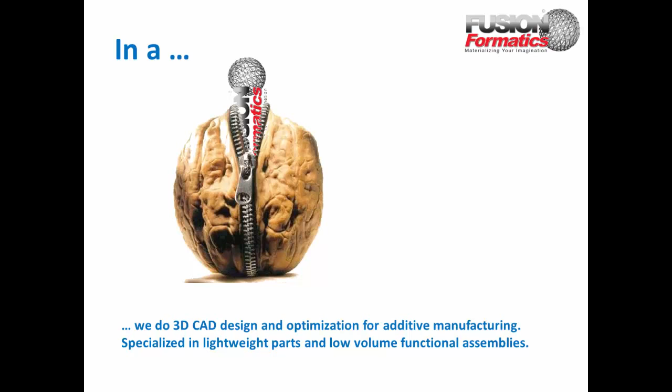So again, we are specialized in optimization for additive manufacturing, and also especially for lightweight parts. Also this for low volume production, not just for prototypes or for proof of concepts, really going into manufacturing, and also for functional assemblies. So we have the focus really on highly complex parts.

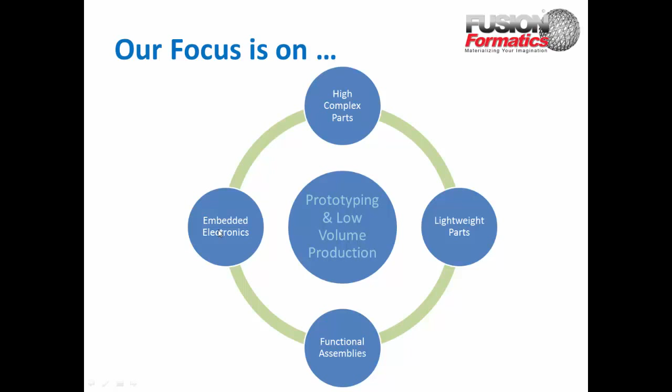We optimize, and we go many times into lightweight parts. We put several parts as an assembly together and can print them as an assembly, so we have functional assemblies, and at the same time we can embed electronics already in the prints.

So our services, at first the design optimization. We do of course also research and development jobs, make prototypes, or also a pilot. So we make a pilot and we can figure out for you what the best way is to print the design optimization, and we can sell you in that case the way how we did it, inclusive the software or the hardware that we use.

We have also print farms, a couple of printers where we can print several parts in an amount, so it's still cheaper than with injection molding. You can imagine if you print 24 hours on 20 printers, that we come there in a good area for ROI, and hardware and software sales is the reselling part.

We are mainly in aerospace, defense, and also in the automotive tool and die. A couple customers also in the dental and medical industry, and it goes further. Of course, we use some nice software like Evolve from solidThinking, where you go into product and industrial design combined with functional design and additive manufacturing.

If we go onto the print farm, sometimes we have a couple jobs just to print hundreds or thousands of easier parts for the entertainment and Hollywood area. And machine manufacturers, we do a lot also on our print farm, since there are a couple parts in the machines.

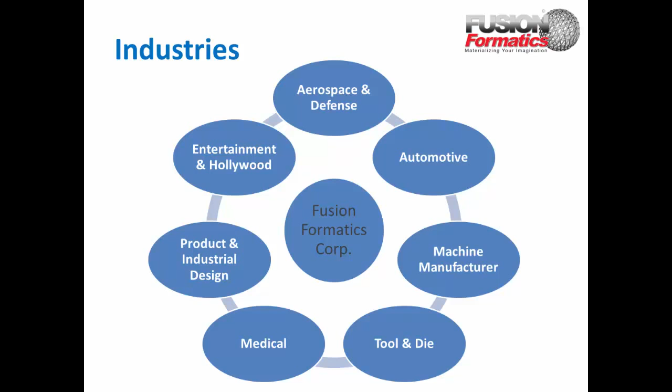When a company doesn't produce more than 10 or 15,000 a year, it's just very convenient to still have printed parts. They're very competitive, let's say the 1,000 or 10,000 parts printed with FDM, anytime open for innovation and changing the part, instead of spending the time and the money for tools for injection molding, and then you have to stick with that as long as it's not amortized.

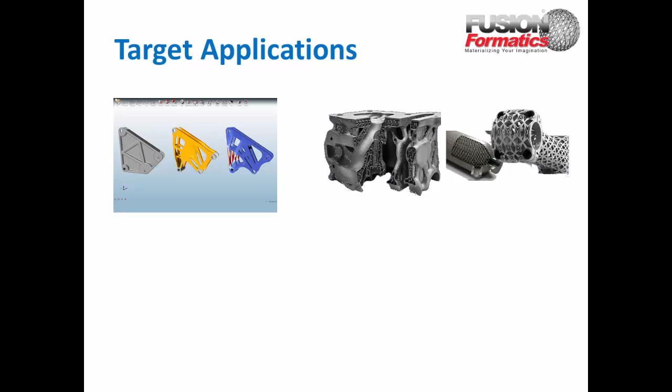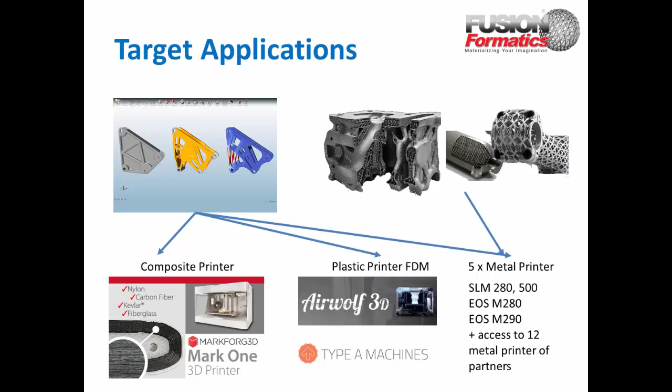So we go lightweight, and that's in different areas. We make hollow cavities or lattice structures inside of the parts, or we really change the design, and with that we can go into composite printing, what we see later on the software for the Markforged Mark One printer. We have FDM printers, and we have a couple of metal printers to go more in this area.

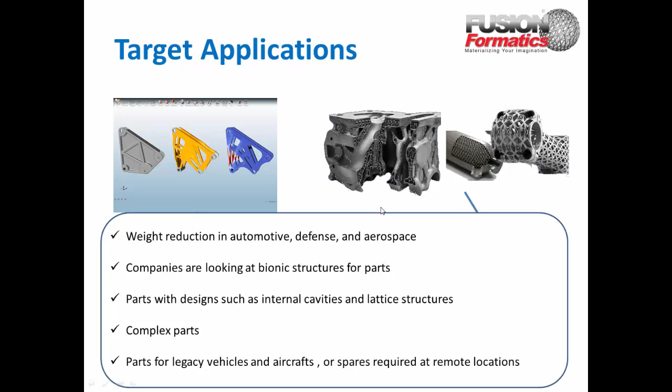Weight reduction, that's clear. Companies are looking for bionic structures more and more. Also lightweight actually goes towards internal cavities and lattice structures. We are interested in very complex parts to optimize them for additive manufacturing, and of course it makes sense, especially for spare parts, not to have everything in storage, but just go ahead and print them if needed. In the medical area, we are also here with PEEK and titanium and different materials.

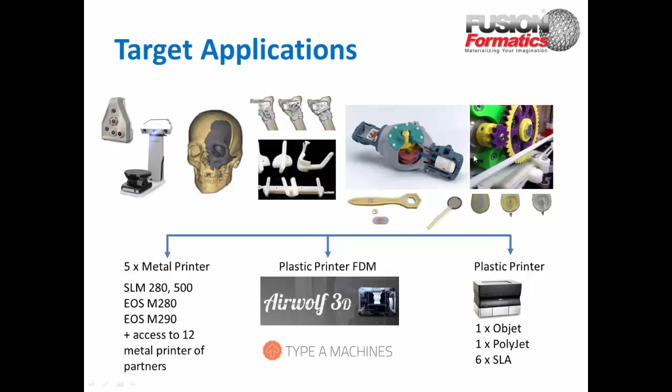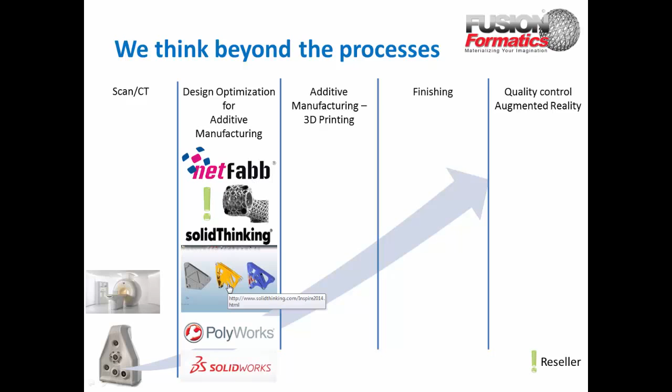Additive manufacturing, we have composite, we have FDM, we have Objet, we have of course the metal printers, and then we have different finishing tools, and also we go into inspection and quality control, even up to vibration measurement. And another one is our augmented reality.

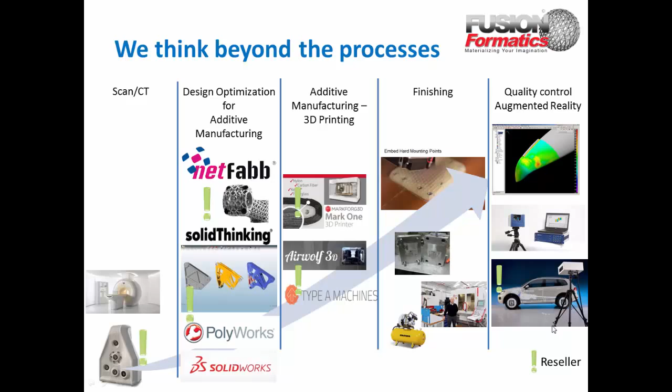We have equipment here, four projectors actually around, so you're never standing in your own shade, and we can project the virtual picture into the reality, in that case a car. This is a technique that we also use when there is an assembly line.

They often have changes, and here the employees are getting nice instructions for what they have to do next, and if it's combined with maybe a printed tool on the Mark One printer with an RFID chip, the software can already recognize what tool is right now being used, and then show the instruction for that.

So this is Fusion Formatics as a small overview, and it's clear that the main benefit in additive manufacturing is really that we can produce parts that are not possible right now in any other traditional manufacturing process, and this brings us to the focus, the vision, and the main benefits of Fusion Formatics as design optimization for additive manufacturing, especially for lightweight parts in plastic, metal, and composites.

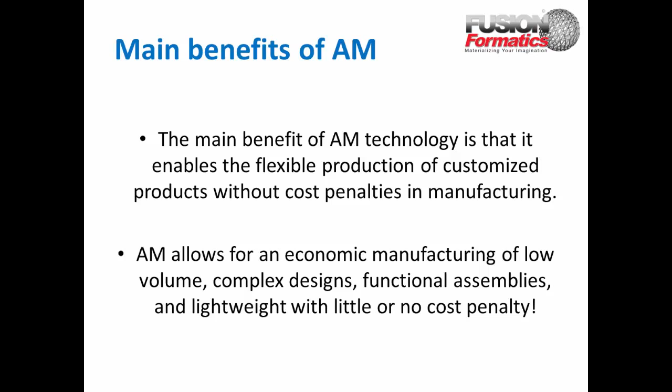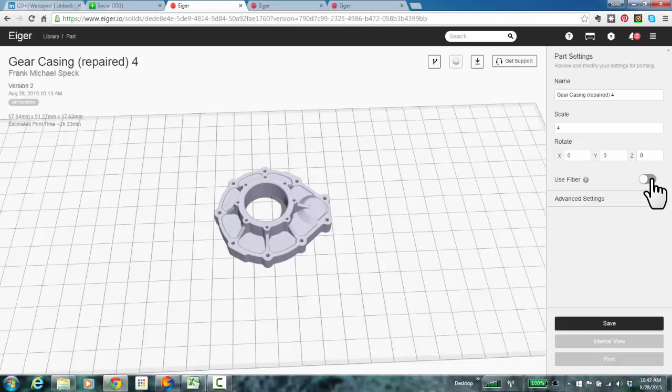You can see here is a part, has also some thin walls, and we want to see how we get the fiber in, and this is how it's on the print bed. Print time 2.5 hours, and we can see here on the right hand side are the buttons where we can go straight through. So the first one, do you want to use fiber?

So you can choose which fiber you want to have and just start from there, and you can say also what pattern you would like to have, concentric, or isotropic. The full makes it really completely full with fiber, as much in each region as you go in. It keeps the same angle. The isotropic, we can change the angle, and what that means, you can see if I go into the internal view in a couple seconds.

I go here a little bit further to the advanced settings. You can also make here a choice if you want to use support. This is very nice to have the option to say no, I don't want to use support, and we optimize the design for additive manufacturing, where Fusion Formatics is specialized in. And then you can have a couple surfaces where you don't have the supports and less post-processing.

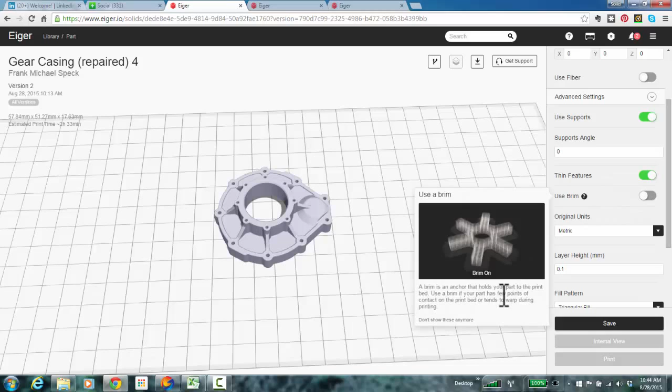We can also use a feature with thin features. This helps in this case. I chose it here because we have here some thin features. It just changes the pattern and the print speed. We can use here a brim. This is good if you have contact on just a few points on the print bed. We have here enough surface from the part, so we don't need this. In case you come with an STL file from an Imperial system, you can of course change it there to Imperial, and then it goes further.

How we want to fill it with nylon, we can fill it with a honeycomb, hexagonal, rectangular, or triangular. So this is the shape for the pattern inside, and then we can choose the density. We can make it very light, and that means the triangles in this case will be very big. Or we make the fill density very high, so the triangles go smaller and smaller, so it fits more nylon in. This is nice if you have a part where you don't want to use any fiber. You can make a very stiff part just pure with nylon, so you can make it full.

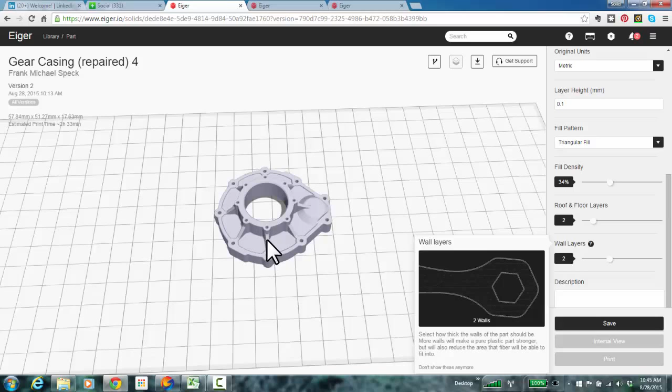And if you use also walls, we can see here 2 walls at the edge. If you put it up to 4, that makes it very stiff. In case I want to put fiber in, I want to make it light but also stiff, I will make the density down. And also the walls, 1 or 2. The point is that I want not so many walls, I want more space in between to put the fiber in. So this is how I go straight forward. You just make these choices, top to down, you save, and the software slices it and calculates it for you.

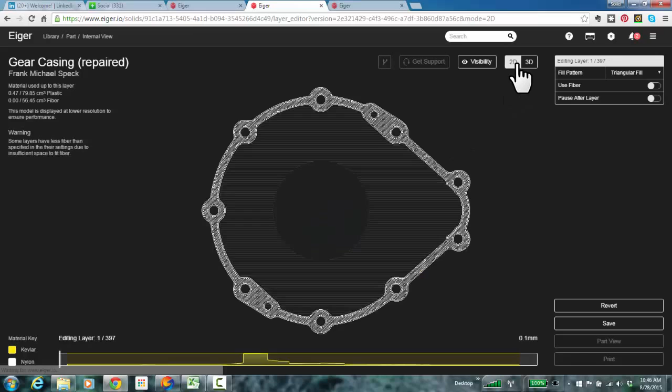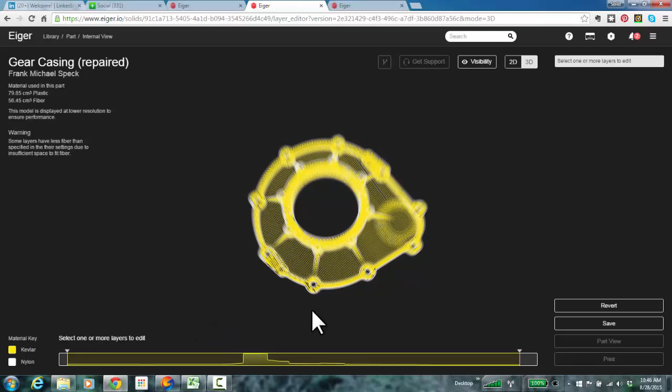If you go to the internal view here, we shift in another version of Eiger, and we have here a 3D and a 2D view. In the 3D view, we can see I chose to pack the whole part full with fiber, and we can nicely see in any area we get the fiber in, and this is packed with, in this case, Kevlar. Maybe I would not choose Kevlar for this, but since it's yellow in the software, it's really nice to see where the fiber goes in.

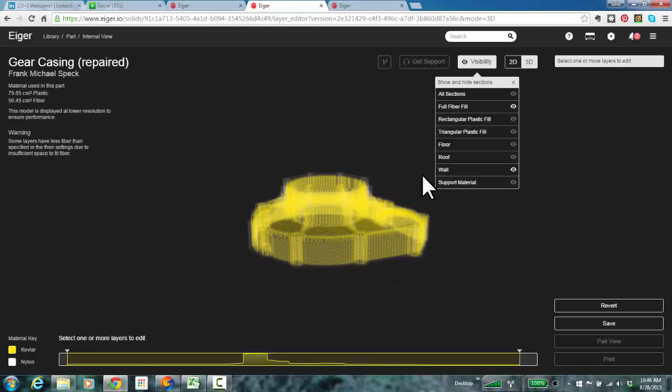So here we can see in every part, if I go a little bit in to show you the walls. Here you can see I could even make less walls, but I think 2 are fine. We still got fiber in, and then I show here the fiber, how we have that set. So this is already automatically calculated.

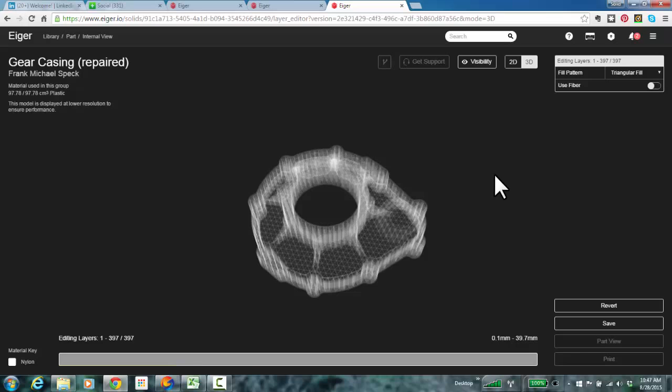I want to show you this with a part which is not filled yet. It's pure nylon. You can see again the triangles, and can change the view a little bit, so you can go through. Here you have the walls, and then the triangles, and we will see how we make that manually more interesting with some fiber. I'm in the 3D view, and I can just choose any region here to put fiber in, and we can see it visually. Let's say go from here to here.

There's also the surface, so it would be interesting to have from the bottom part, from the surface, and from the top part, to see how we get the fiber in. And I just will choose here fiber. I use isotropic, which I like, we'll see, but I want to shift the fiber angle from layer to layer.

So just use first layer 180, and then 135, 90, 45, and 0. And this doesn't have to be exactly these numbers. Sometimes I go through and I see that I get with a 0-degree angle fiber in a part I like, or maybe even sometimes it's 1 degree. It really depends, and you will see that when we go on apply for the changes.

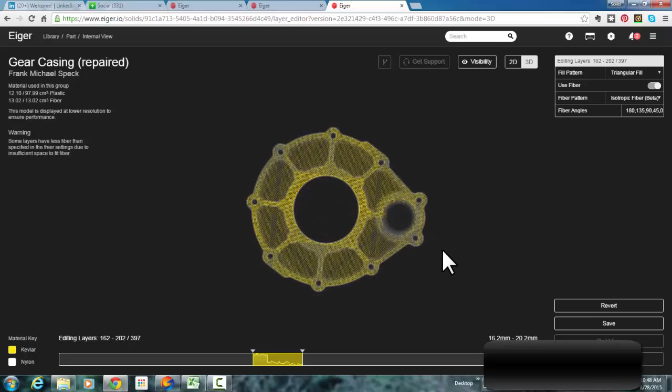Now we can see on the bottom in this bar, the software calculates where it gets the fiber in. We see also here with this graphic how much fiber it gets in. This is obviously here where we have the surface on top, and there we get in. And now I want to see if we get fiber in each region, and yes, we got fiber in each region. That's very good. We make here a better view.

I just want to have the isotropics. I can see that at this point here is maybe a little bit less. Of course, it could also just be we go a little bit higher and we have more, but I showed you this in the 2D view.

We have here fiber 180, and now we go with 135, so the angle changes, and that way we get the fiber in different areas, and also the change of the angle just makes it more stiff. This is from layer to layer, so we get the fiber in each area here, and that was the top view that we saw. Really we got in each area.

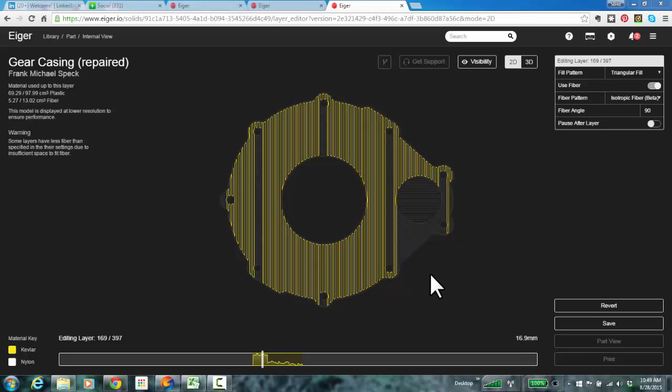So now here we got nothing in, but the software will automatically make here a very thin layer with nylon, so not the triangle pattern, it uses here also the isotropic pattern. And if you go forward, now we have the 45, and we get fiber nicely in, so you can see how we get in each area. Now we go a little bit more to the end, it changes here, we come really in each area, and I want to show you here.

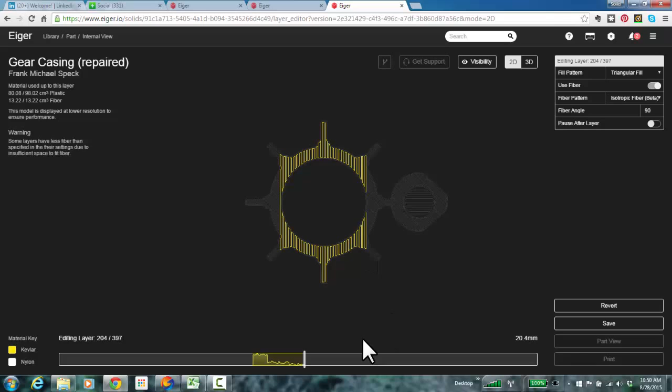I want to have just a couple layers now with fiber here in this area. Use here 90, and then we go one forward, choose here again, and I choose here also 90 to get slowly in. And now we go in one, and we use the pattern full fiber. And now I shift the view a little bit, it's even more dark, but you can see how I get nicely in. So I can make here also just a couple layers.

I go in the 3D view, select from here to here, use fiber, but I will say full fiber, and I say apply changes, and then you go into 2D view. You can see here how we get there in each region. So here the right hand side is good with fiber.

I also want to quickly show you, if we are in the 3D view, the concentric, making maybe here a small one, make fiber, use concentric, 30 fiber rings should be more than enough. If it's too much, it doesn't matter. If you make one concentric ring, it will just make one ring. If you make 30 but just 3 fit in, it doesn't matter. It fits in as much as it can.

See here, again, the calculation on the bar, seems like we got a lot of fiber in. So we go to this point, the fiber goes concentric in each area, and there's a lot of it. So that's the way that you get concentric in.

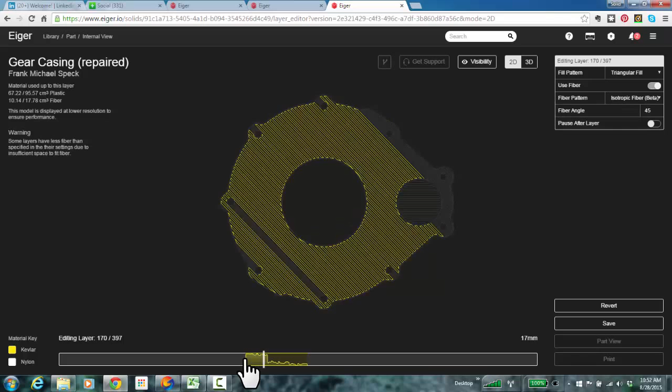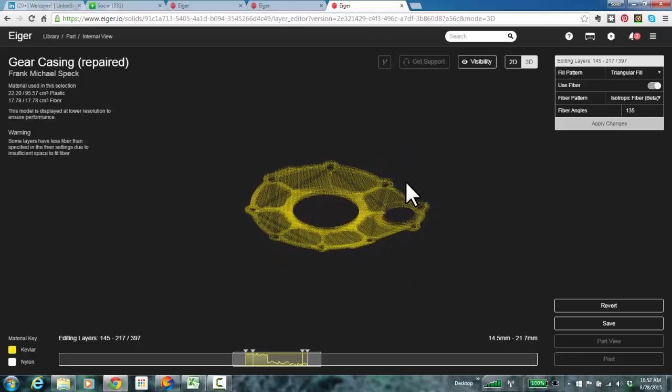Here we have an isotropic, changing the angle from layer to layer, and then we get in each region, making it very stiff. This is with isotropic, but if you want to have just a lot of fiber in each region, you just use the full fiber, which gets it really in each area. This is how you get fiber in with different techniques, and you can make a decision on each layer. Going back to a full 3D view, maybe without support material, and also a full view of the part.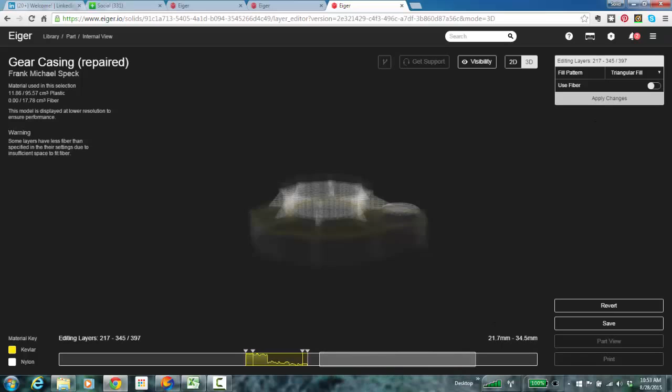So here we can see that's how we just influence a couple layers. You can do a lot automatically, very fast through the part, and just use a fiber pattern, and you apply it, and the software goes through and makes this very fast, so that you don't have to go from layer to layer. You can really just make a pattern and have a part very fast in a way that you like.

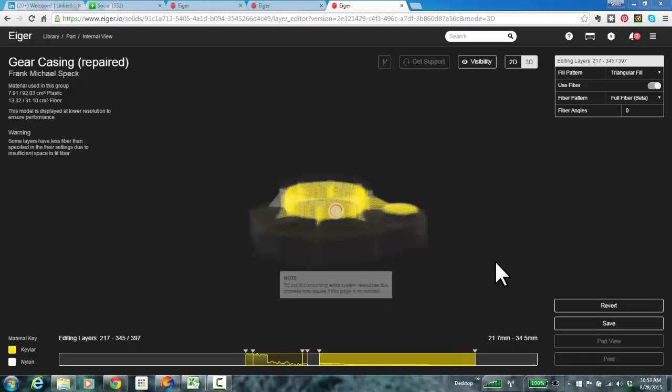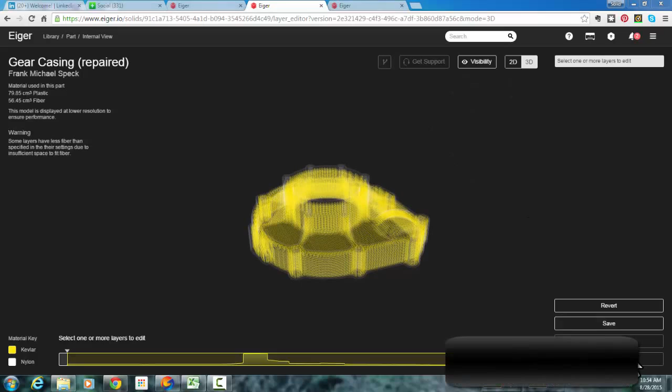You can see here again, now we made the full part on top. Go in this region more, so you can see where also in very thin areas we got the fiber in. Alright, this is the presentation of the Eiger software on the gear casing part, and this shows you a little bit the straightforward but also easy flexibility of the software.